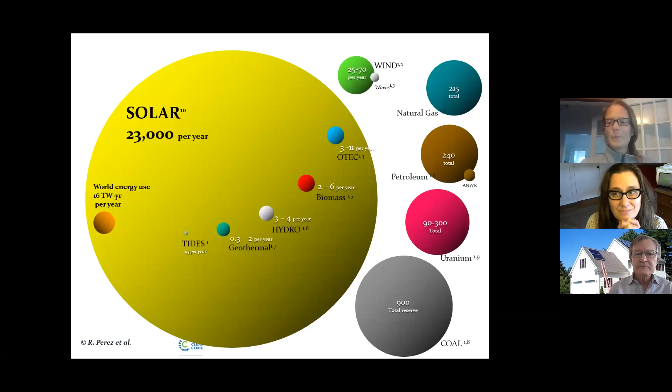Then you've got a lot of your renewables, and you can start to see how these match up, but certainly a bit smaller, things like wind and hydro and geothermal. And then when we take a look at where solar fits into this picture, you can see that there's a clear answer here. It's an incredibly abundant resource that we certainly don't capture enough of quite yet, but programs like these help you adopt technologies to do so. So that's why we're really excited about solar hot water.

So John is going to go into this in a lot more detail, but just on a very high level, solar hot water systems are similar to solar electric, but instead of converting the sun's energy to electricity, it's just converting it to heat. So it's using the thermal energy from the sun. So you've got a solar collector up on your roof, which is going to connect through to your water heater, probably in your basement or something like that. And it's pretty much as simple as that.

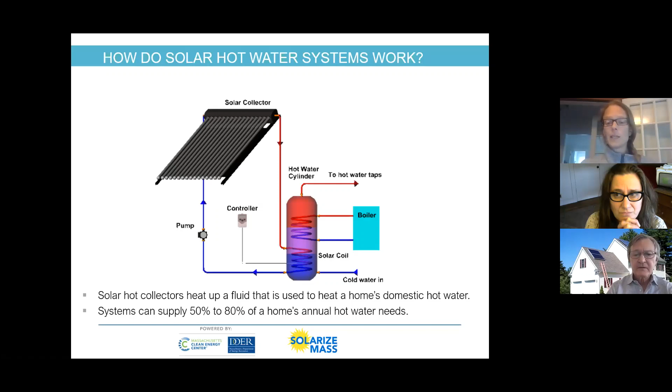Again, John will go into it in a bit more detail, but the solar collector is heating up that fluid, and it's heating your home's domestic hot water. Typically, these systems can supply 50 to 80% of a home's annual hot water needs as well, so they're very effective.

Very quickly on what makes a good solar hot water site: you need space that's available for collectors, and the structure should be capable of supporting them, an open roof area of about 50 square feet or so, or a potential available space for a ground or pole mounted system. Within the home, of course, space available for a storage tank. Ideally southern exposure, but solar hot water is certainly more tolerant of shade than PV.

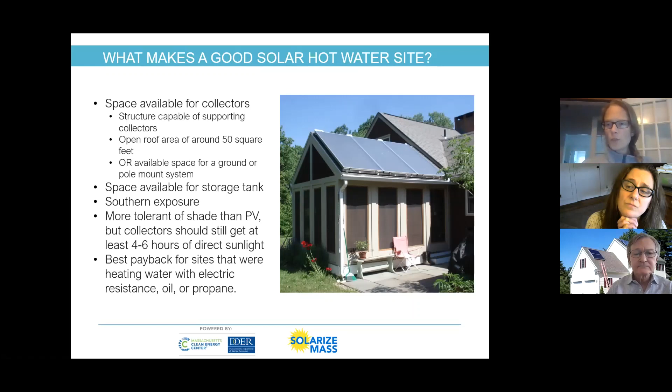But solar collectors should certainly still get at least 4 to 6 hours of direct sunlight. And typically the best payback sites are those heating with high-cost fossil fuels like oil or propane, or something like electric resistance. Not to say that other ones can't be a good value, but those are certainly some of the best.

So very briefly on incentives and programs, just going to give a high-level overview so that John can really dig into both the values, but also what this looks like in practical application. So the incentives available in Massachusetts: you've got rebates, so these are just direct cash incentives. You've got loan options, so these are financing options to cover the upfront cost of the system.

You have something called alternative energy certificates. This is an upfront cash payment as well. You've also got tax credits, which is an opportunity to cover your expected tax payment. And of course, this is going to vary based on your tax appetite.

So high level on the value of some of these: the MassCEC rebate can be anywhere from I think probably about 2,000 to upwards of about 4,500. I'm sorry, 4,500, not 45,000. That would be crazy. There's also a federal tax credit. You can take off about 26% there, which is quite nice. A state tax credit capped at $1,000.

The Mass Save HEAT Loan, which John's going to talk about, is a 0% loan that you can have for 7 years for up to $25,000. So this is an incredibly valuable loan that can help folks, and typically this covers the cost of most systems, so that's a really nice opportunity there as well.

The credits really vary based on your system, so I'll let John talk about that. And there is also a sales tax exemption. And for the MassCEC rebates, you can get a higher value if you are income qualified. And like I mentioned, the HEAT loan is typically sufficient to cover the cost of most systems.

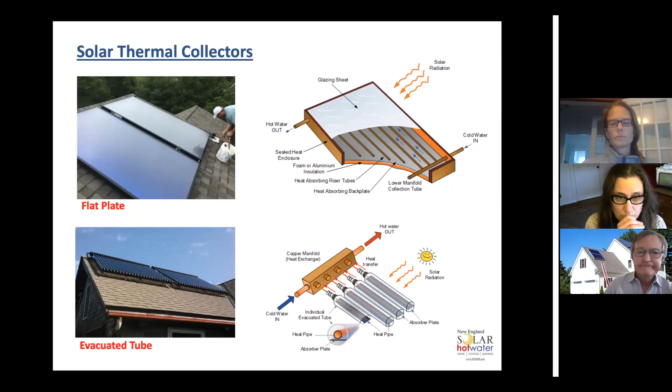Just want to make the point that solar thermal has been around quite a long time. As I said, in the 70s was a really exciting time for solar hot water when Jimmy Carter mounted some panels on the White House, soon taken down by Ronald Reagan, but they were there for a little while. But there were quite a few systems installed then, and it really hasn't changed that much since then. The collectors back then were 80–85% efficient. They still are 80–85% efficient. It's just a very simple principle that can't be tweaked much more than it is already.

Here we use it primarily in the Northeast for domestic hot water, not so much for space heating because of our low winter sun and short days in the wintertime. So it takes quite a few panels to try and make a dent in space heating, so we don't do it too much. We do it sometimes, but not too often.

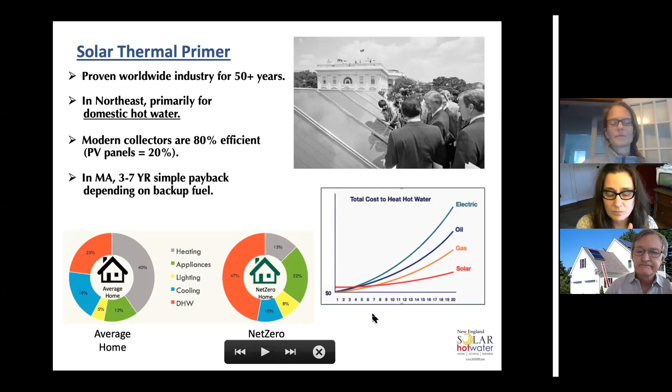We also add a mixing valve because we allow the storage tank to get hot, hotter than you would normally use in a house, because it's free energy. So the more we can store, the better. It'll last through those cloudy days better. And then as it comes out hot, we mix it with cold before it gets delivered to the fixtures upstairs.

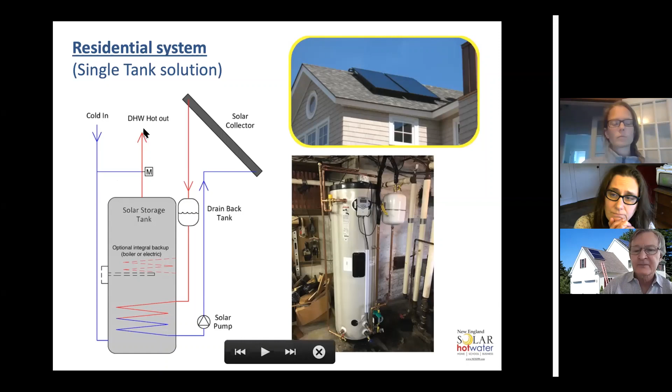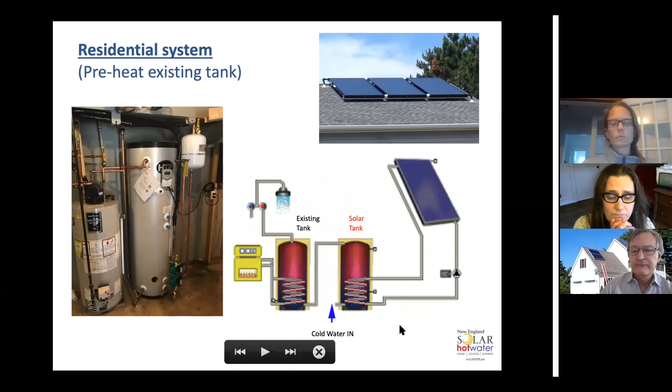A look at the tanks we use. These are actually made in Massachusetts. They're stainless steel tanks. They're a very common tank in the Northeast and actually throughout the country for boiler indirect tanks. They make a solar version with that solar heat exchanger at the bottom. They're actual lifetime warranty tanks. So as long as the homeowner is in the house, the tank is warranted.

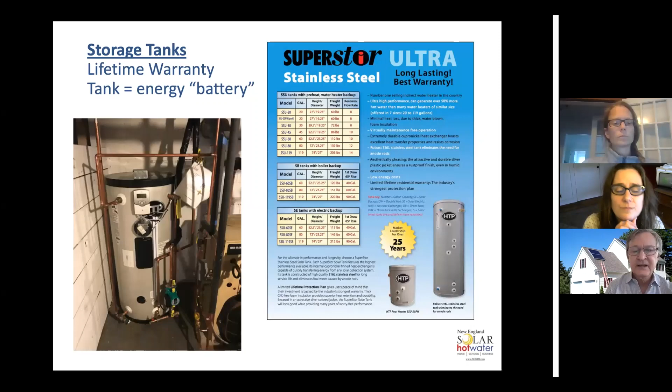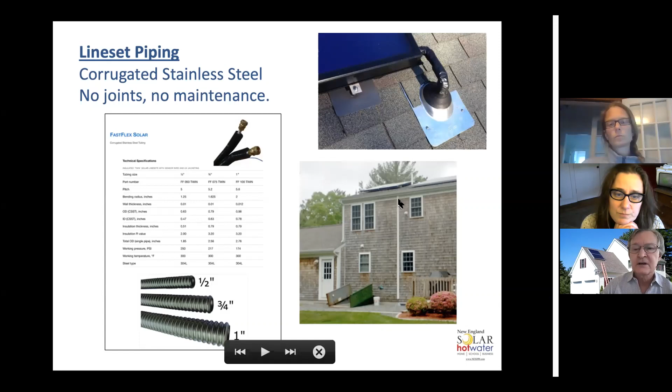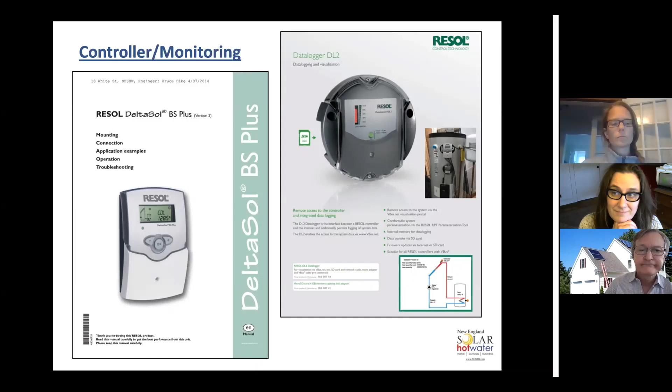The maintenance on these systems, because of the drain back function that I was describing, is really minimal. Those collectors are empty at night. They're empty when the tank is fully hot, so they can't really overheat or freeze. That's kind of a problem with some of the pressurized systems in the past. So we found that they really take almost no maintenance. Our warranty is 4 years, soup to nuts, labor and materials. As I said, the tanks have a lifetime warranty, and the collectors and line set are 10 years.

Basic maintenance is to take a look at the solar fluid every 5 to 7 years, just make sure there's enough there and the glycol hasn't broken down. And then those little pumps can run out after 10 to 12 years. That's an easy replacement any plumber can do. The system's basically expected to last 20, 25 years, and they do. We're just now taking down some systems installed in the Jimmy Carter years that have worked that long, so 1979, early 80s.

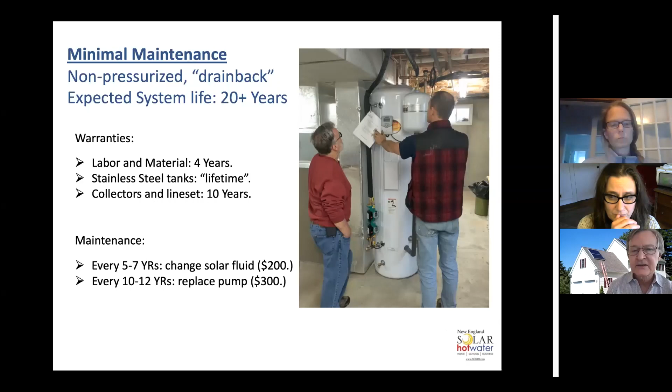It's offered for solar hot water systems, and then there are also adders depending on whether you have solar PV as well, whether you opt for the online monitoring, and whether or not you qualify for moderate income. The HEAT Loan financing that Lisa mentioned, 0% interest, no better deal around. I think half our customers opt for this. It's very simple. You do have to go to a bank to close a loan, but not a lot of paperwork involved. It's usually a 7-year loan, and so you can pay off that upfront cost with a monthly payment, and oftentimes cover it with your savings.

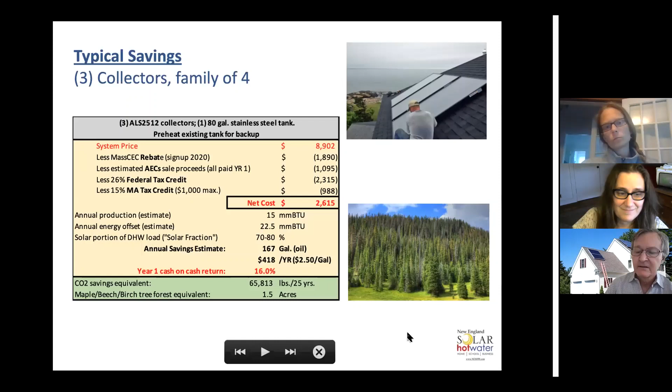And I just want to mention that multifamily properties, if you own an investment apartment or a 2-family house, or up to 3 or 4 families, the numbers are even better, because not only do you have those incentives that I described, but you also have what's called accelerated depreciation. This is for all solar systems, which adds a really great additional benefit. And of course, if you do a 2 or 3 family, you can have one system serving 2 or 3 units. So you don't have to have 2 or 3 different systems, so there's not a lot of replication of elements.

You might have one large tank. This one, for instance, is 4 collectors and one large 119-gallon tank. So for a 2-family, it doesn't cost twice as much as a single family, as you can see here, but you get all the same benefits and all the same oil savings or whatever backup fuel you have. Here, 4 collectors is equivalent to almost a 2.5 acre forest.

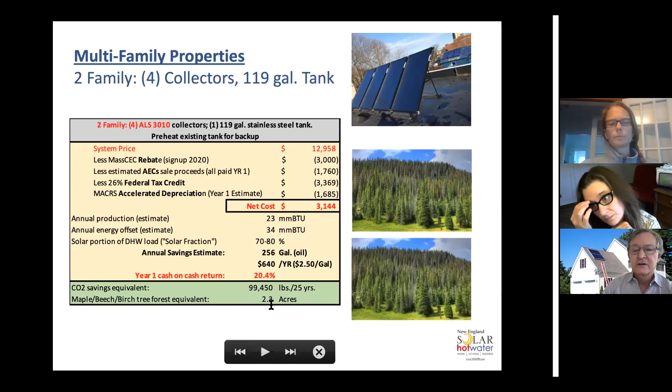But we do like to tilt them somewhat if possible, because we like to get that winter sun when the sun's low, to get as much production as we can in the wintertime. Summer is no problem. We always provide plenty for summer and most of spring and fall, but to get that winter sun, the slight tilt towards 45 degrees or so is helpful.

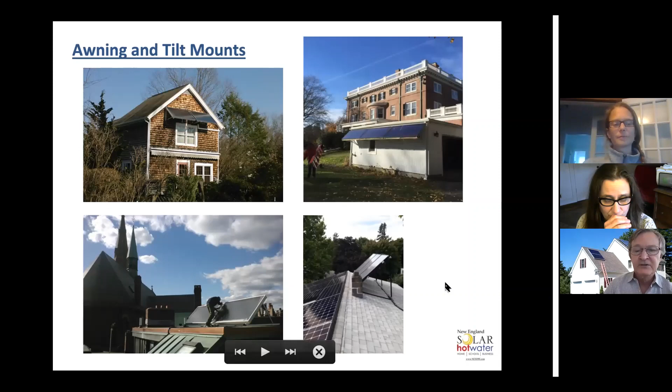This other one on the left, this is in Beacon Hill. Again, in a historic district we found a spot where collectors could be mounted where they couldn't be seen from the street, so it passed the Historic Commission. We have quite a few customers that do both. If you have an existing PV system, we can usually find a spot for the solar hot water collectors next to or behind. Here you see on the north-facing roof.

So if you're putting in a new PV system and you have plenty of roof space, it's worth looking at adding PV panels to cover hot water. But if you already have a PV system, it's usually not economical to add PV panels to cover hot water. It makes more sense to go with solar thermal.

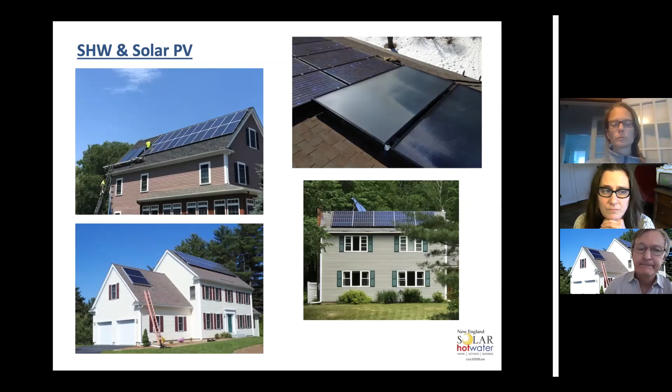And then we can also do roof mount on a flat roof, tilt them up, which is very common for commercial systems. Some small commercial systems, just to give you an idea, if you know anybody with a commercial building that uses hot water, or a pool, exercise club or dormitory. This is a Harvard dormitory we mounted on some existing skylight roofs. Here's an apartment building where we did an awning mount again. Condo building, small condo building.

And we do very large commercial systems as well, up to 60, 100 units. Same idea, it's just more collectors and a much bigger tank, but same idea with the heat exchanger, same idea as a residential system.

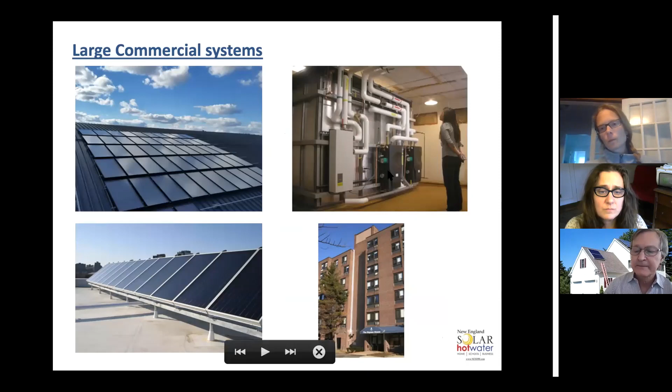And we try to disinfect all the control devices before we leave so that they're clean for the customer's use, although they don't really need to be touched once we leave. It's all meant to run on its own without user interaction. And that is all I have.